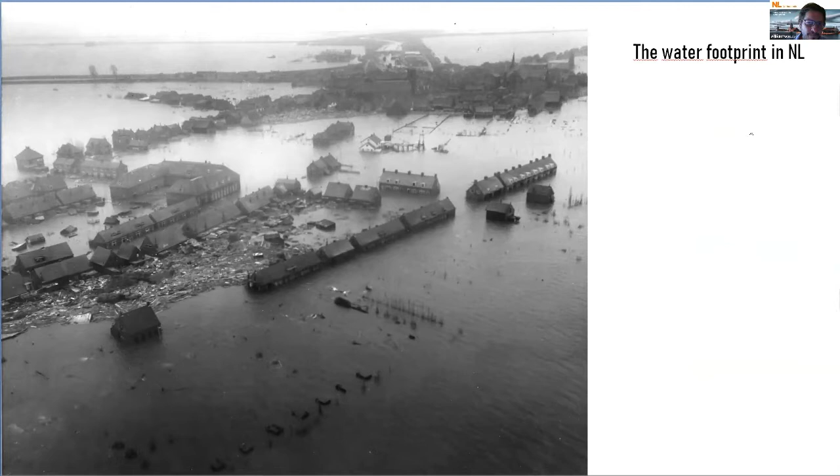This is to understand what we call the water footprint in the Netherlands. Of course, climate change affects us all, but its effects differ strongly from one country or region to another—coming back to this idea of context.

For the Netherlands, several reports from the past years have shown negative impacts, with extreme weather events such as increased temperatures, heat waves, drought, and of course the rising of sea level.

In the Netherlands, the Room for the River program is a government design plan intended to address flood protection, master landscaping, and the improvement of environmental conditions in areas surrounding Dutch rivers.

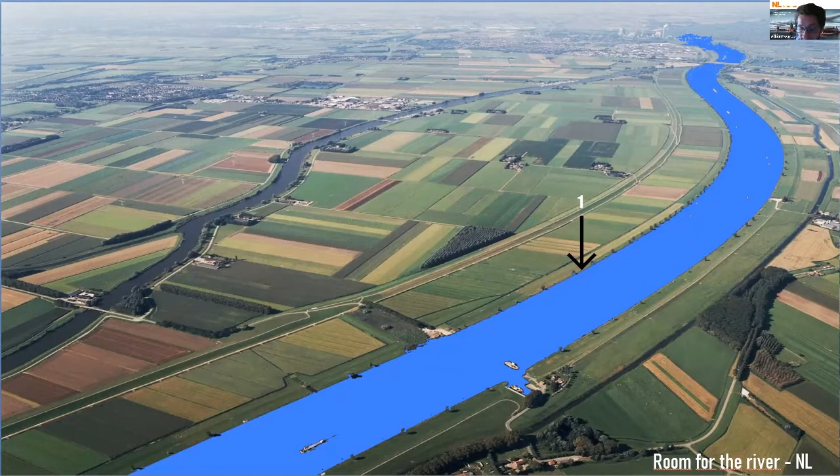This project was active from 2006 till 2017, and the main goal was to manage higher water levels in rivers by lowering the levels of flood plains next to them, as we can see in this picture, creating water buffers, relocating levees, increasing the depth of side channels, and constructing flood bypasses as well.

It also contemplates the possibility of creating solid platforms to develop new activities in these floodplains. Mitigation, we could say, is the best form of adaptation to climate change.

And this is, we could say, one of the most important statements that we have in the Netherlands to deal with this.

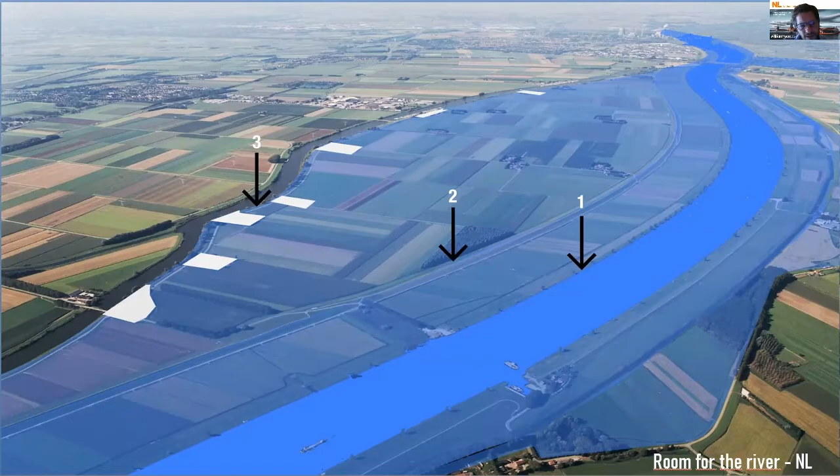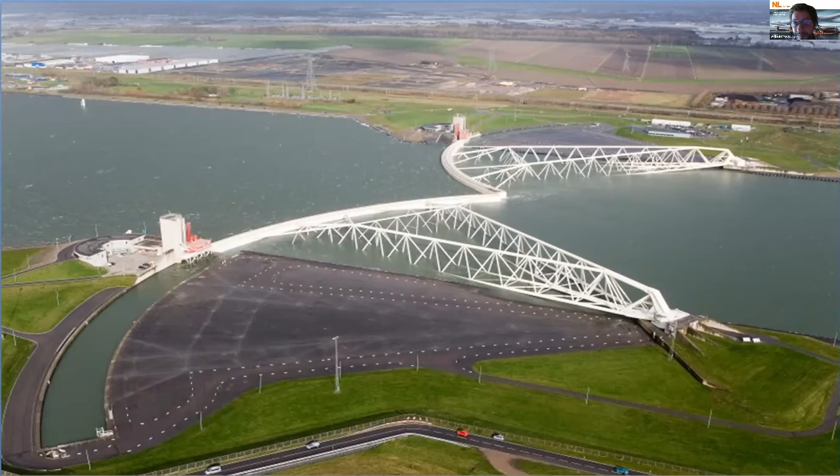Of course, this is all these years of development, of history, all these engineering interventions in the territory. We could say on a first level of urban structure, the water in the Netherlands defines the urban tissue, different urban and rural patterns.

So when we refer to this term, the water footprint is not the typical engineering approach where we define a specific consumption amount of water for agriculture. The concept of water footprint for us is related to this mark left by water in the territory, the cultural aspect of water, which is also very, very important.

As a member state of the European Union, the Netherlands is committed to the European goal of achieving climate neutrality, as the ambassador explained, by 2050, and to the European target of a net domestic reduction of at least 55% in greenhouse emissions. The question, of course, is how to achieve this.

Well, after this brief introduction, we'll try to grab some main lessons from the past that we would like to share with you, to understand why or how.

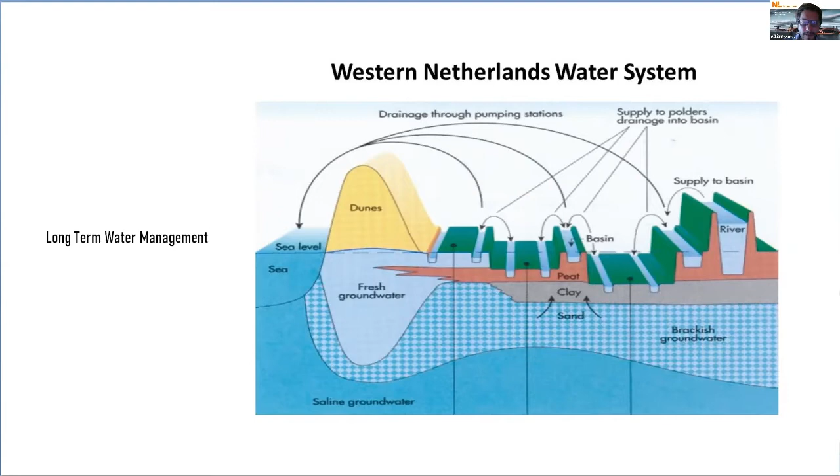Another important aspect related to this is long-term water management. Mostly the long-term part of it is key. This is an image representing the Delta model that we developed in the Netherlands. This model consists of 3 national programs and 6 regional programs, including safety standards, water supply, spatial management, etc.

And lastly, I would say that this could also be a trademark for the Netherlands: thinking out of the box. Sometimes it's very surprising to see that when you think everything is solved, the Dutch are always bringing a new concept, a bold concept that provides innovative solutions to deal with these aspects. This was the case, one beautiful example in the Dutch coast as well.

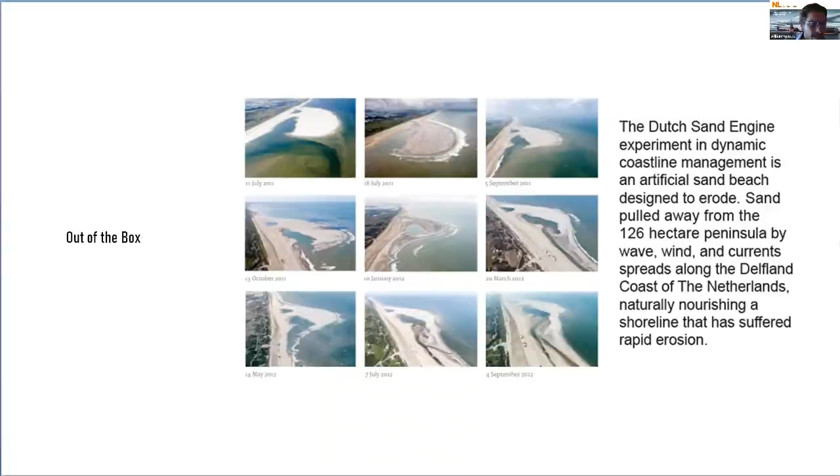It was an experiment, the Sand Engine, using the forces, the currents, the sea currents, adding sediments in specific areas, very well planned. Naturally, it was building — we introduced the term building with nature here. This artificial, if you want, natural-dash-artificial peninsula. This was the final result. Still there. Thinking out of the box.

Regarding the cultural context and the second aspect I wanted to emphasize, I brought this short story about the bicycle. Because it's not just about the artifact itself, but how something like this can trigger or define our urban planning. We must tell you about the bike, not only as transport, but as an urban catalyzer.

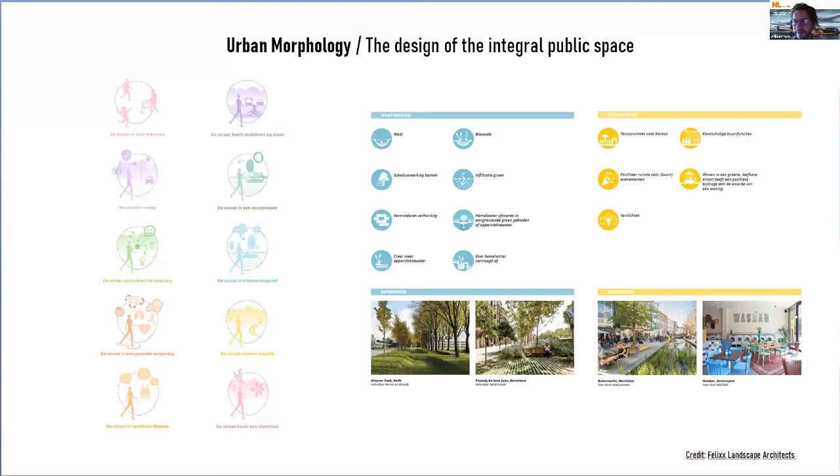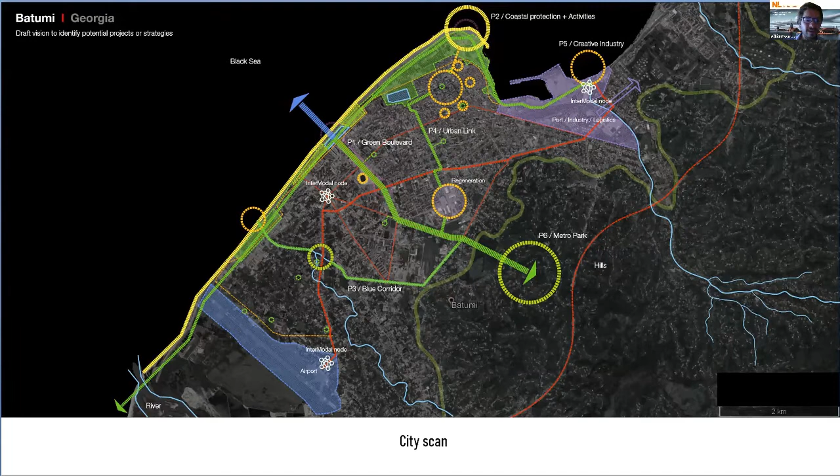We have the chance to work in the city of Batumi, together with my colleague Dirikian, and with the collaboration of Wetlands International. To give you a brief example of how we proceeded with the city, the first step was to make a quick scan of the city to identify areas of opportunity. With that, we created priorities and defined two areas to develop.

The first was the green boulevard, that today is actually not so green, but the idea was to transform this boulevard and better connect this area with the sea, because now we have this lake in between. You don't see the entire picture, but behind the lake we have the coast and the sea.

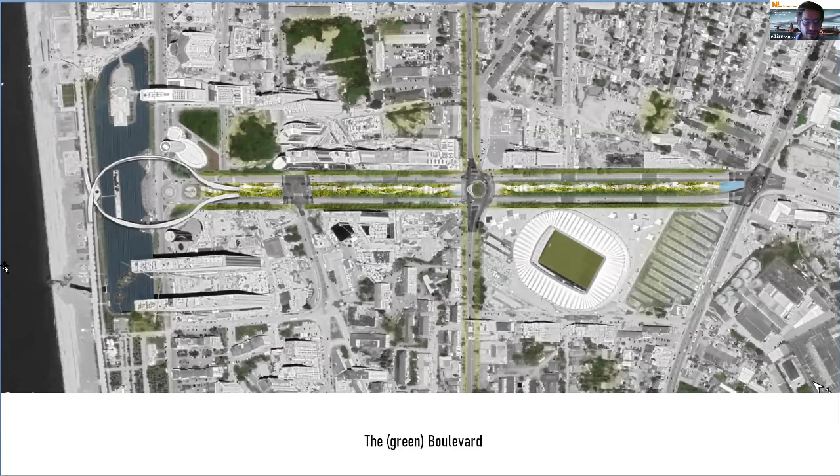So what we did was propose to transform this area into a linear park and connect through two pedestrian bridges over the lake to the coast. With that we improve the conditions and quality of urban space, we work with resilience, infiltrate water, create better urban ecosystems, and make it better for visitors. This is just an impression of how this can be transformed.

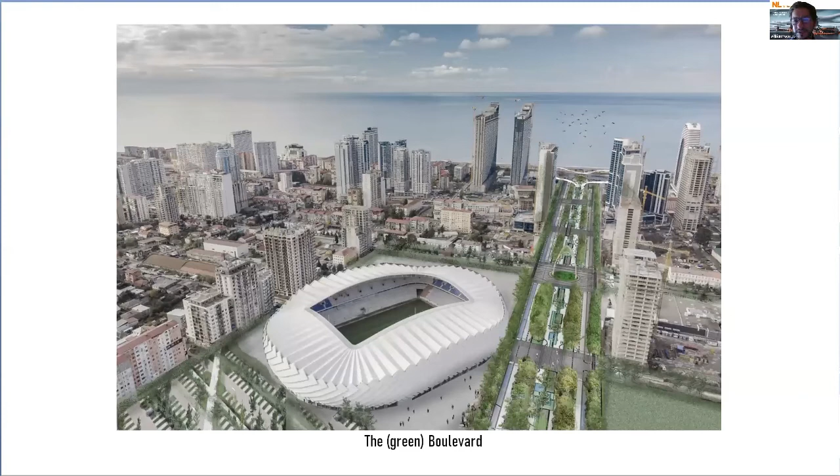And the second area of opportunity we defined was the port area, where the strategy was to bring or create a creative industry district and a coastal park.

This was more or less the result of that plan, where we transform what you see here in light purple - an in-between zone with highways going around, some old factories and abandoned shipyards. The idea is to transform this and use the synergy of this intervention to create a new urban coastal park next to the port, as you can see in this color zone, using nature-based solutions, building with nature, as we explained earlier in our Dutch examples.

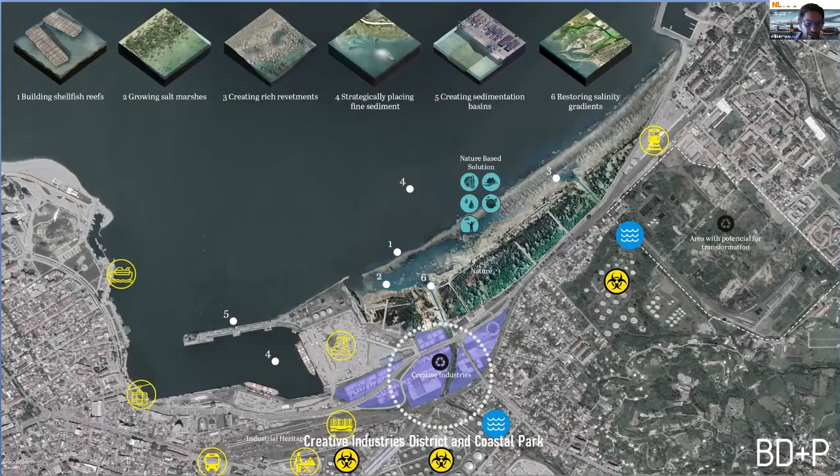For Kutaisi, we've been investigating a little bit. Of course, we would like to hear from you - what are your challenges, what are your ideas. This is a small scheme of the city.

We are aware that you have this river flowing from north to south. We identified some areas for possible zoning: an industrial area, tourist destinations, the city center where the railway stations are located, where we can create a connection, perhaps another green corridor for biodiversity, potential youth districts, etc.

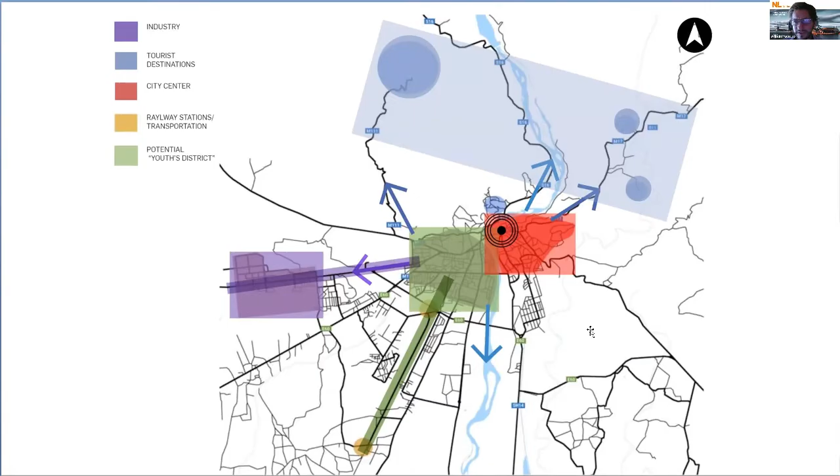I work in the Netherlands at the university and also for an engineering firm, and as you know, the Netherlands is famous for its way of working with water. What Adrian was telling you was to look at your own area and define what makes it specific, what makes it unique, and build your master plan on that. I'm really happy to hear from the mayor that you are working on a master plan that already includes green city measures and smart city measures - I think that fits well.

As you know, and I saw it last week when I was in Georgia, in Tbilisi and in Batumi, cities are growing. Where today we have only 3.5 billion people living in cities, by 2030 that will be 60%. So it will be rapidly increasing.

That brings challenges with it. Maybe due to Corona and the COVID situation, this trend will go slower, because I know from friends who want to move out of the city and live in the rural area again. But I think in general, the trend is that more and more people will live in cities.

We also know that 90% of disasters are related to water. That means not only flooding from your city being located along a river, but also flooding from rainfall. Nowadays, if you look at most cities, it's very much paved, a lot of concrete. As an example, the Batumi Boulevard is very sensitive to flooding due to rainfall.

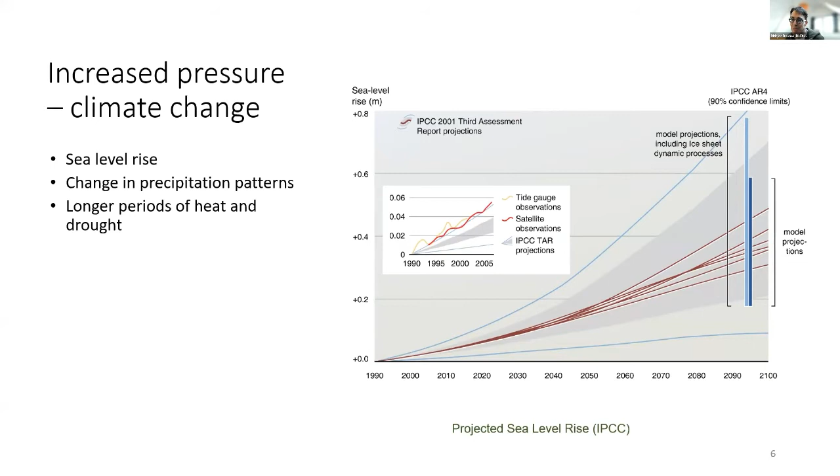We have rain too. In the past, we calculated our sewage system for rainfall of 20 millimeters in an hour, but now we've seen rainfall events of 100 millimeters in an hour. That means our sewage systems cannot cope with it. So we have to do things already now.

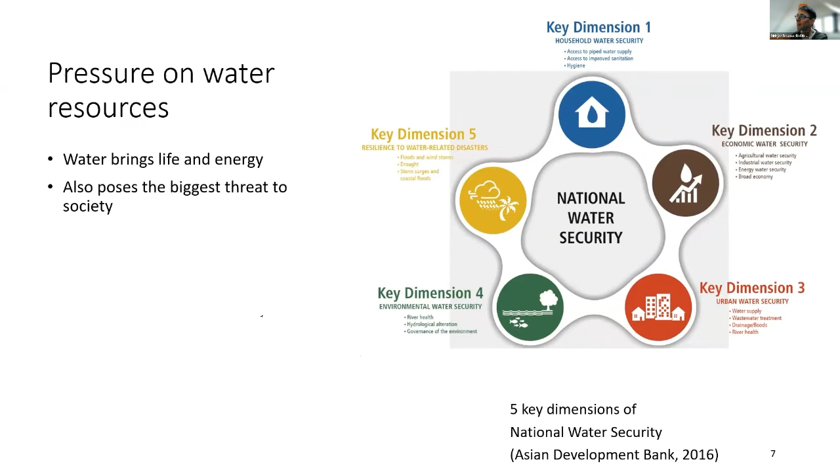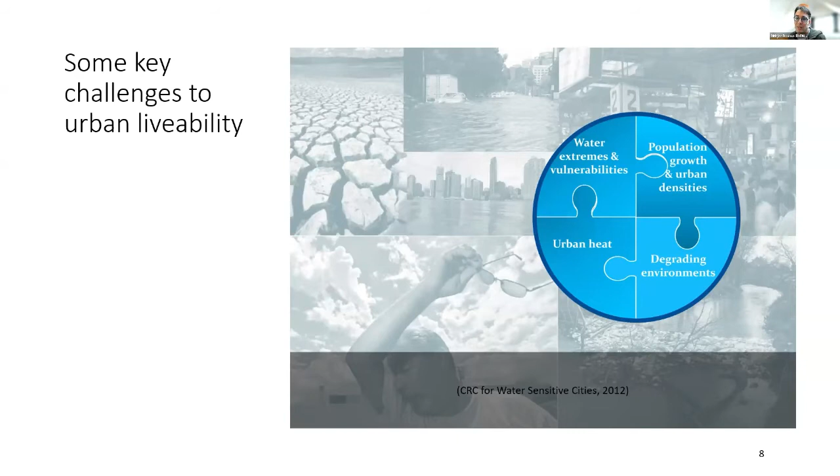All these pressures from water affect each household - this is 5 dimensions from the Asian Development Bank showing the impact of water on our daily life. So my message to you is, if you look at your urban livability and urban planning for your city, take water into account - not only the existence of water, but also if there is no water, like dry periods. Maybe we can keep the water longer, so you can use it for irrigation to keep the biodiversity in your city.

For this, we have solutions - what we call, and the World Bank calls, the blue and green infrastructure. That means trying to keep forest, wildlife, and the river in your city. Don't make everything concrete - just the blue and the green, and also blue measures. How is your stormwater, sewage system, and drainage organized? How are you protected against rainfall, flooding, or flooding from the river?

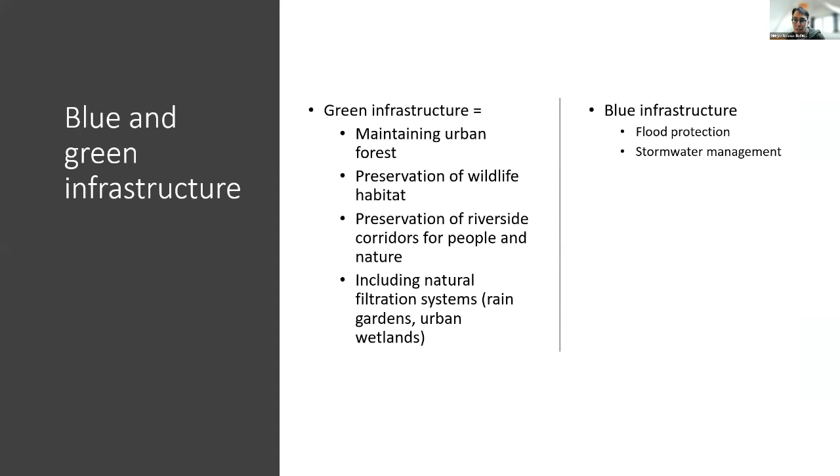This is a bit high level, and I'd like to show further on in the presentation examples of how you could apply that at street level. But before you're at street level, you start with a vision. It's nice to hear that you and your master plan already have a vision on greening your city, and you already have a vision on smarting your city.

What I teach the students is often the water sensitive city concept. That means making your city physically attractive to keep the water, to solve water issues in the future. But that's too narrow-minded - what it actually means is you can also co-create things for mobility and the social sphere. You can do more than just address the water issue.

This is a bit blurry picture, but this is Hoboken in New York, where we designed a dike to protect it from river flooding, or coastal flooding. But this dike is also a cycling road - it's also a nice park for people to go out.

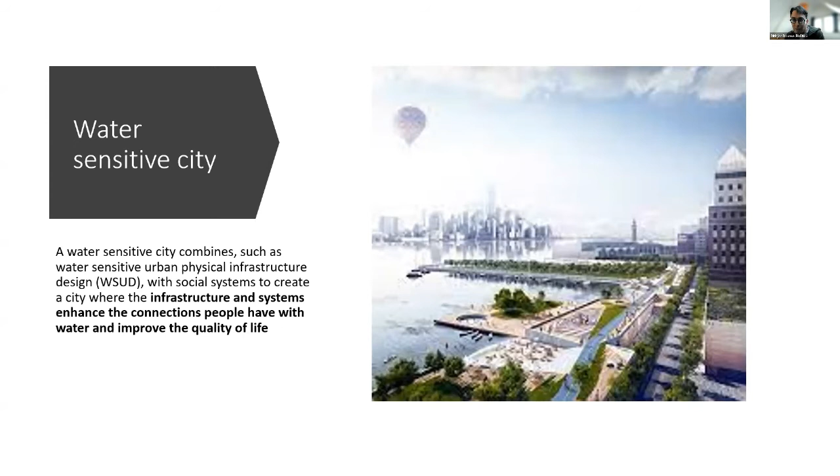It's also a building where you have concerts. So the dike is not just a dike, not just to keep the water out. It also serves the people who live there. You need to know what kind of people are living there, because you don't want to make a children's playground if only old people live there. Or you don't want to make a park with a stepped approach where old people live, because they cannot walk all those steps. So you want to adjust your concept for flood protection to the people who live there, and for that you also want to involve stakeholders.

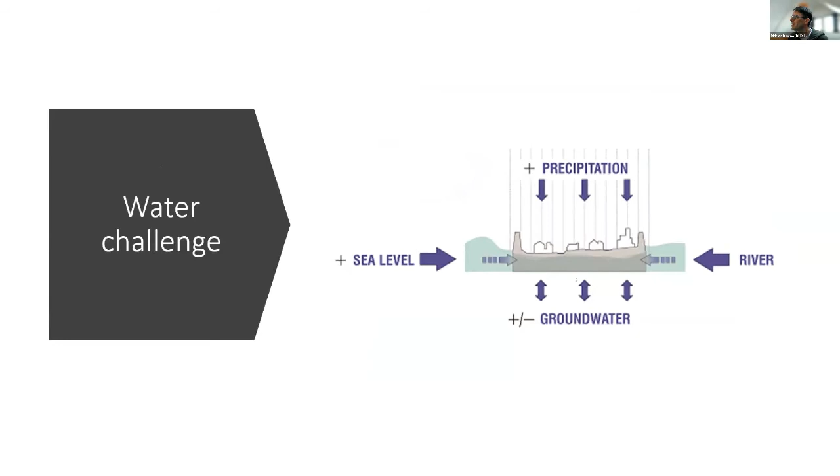One is to store, it's like a sponge, and the rain will be kept inside the sponge. The other is retention, so you can squeeze a bit out, slowly it will drip out of the sponge when it gets full, and then it will be kept for a while, it's just delaying. Or you can discharge it, so you get the water as quick as possible out of your system. This is always necessary to prevent wet feet, because you don't want 30 centimeters of water on your street level, or like in Asia where they drive a lot on scooters and motorcycles. It should not come above the pipe, because if it's above the pipe, the motorcycle will not work.

So what you could do in the past, what we did mostly, was bring the rain that comes in, run it off quickly, drain it directly into your sewage system, and then discharge it to a river. Nowadays we think that is still possible for some locations, but you want to do more and better, also in combination with that biodiversity wish and greening wish.

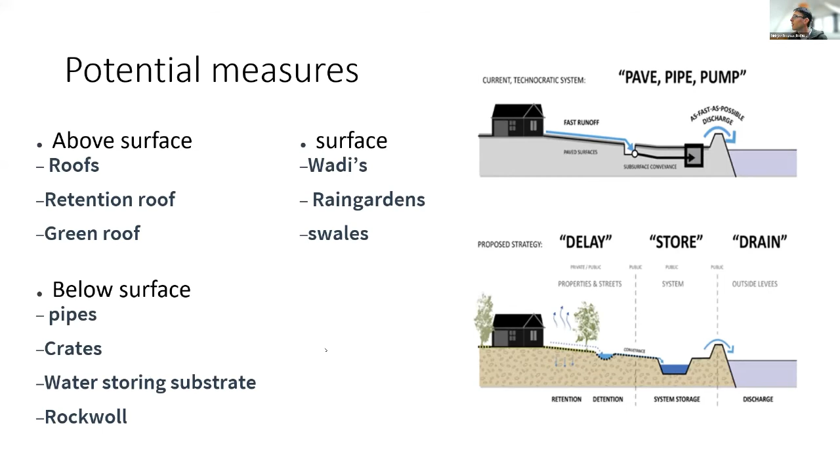So this is a lower place in your street where water can go in when you have a rainfall event. On the other days of the year it's dry, there's nothing inside, it's a wadi. You also have rain gardens, which are just flowers and trees along your street where you can also keep water. You can store it there and delay it. And of course you have your solutions below the surface, like pipes, crates, water storage under your surface. I will show some examples in the next slide.

So here you see all kinds of possibilities nowadays. We see green roofs with solar panels. We see here even water retention on your roof, so you can keep the water here for a while before you drain it to your sewage systems, to your pipes. You have swales where water can just be stored. You also have the rain-catching parts along the buildings. And you can also use underground structures to store water.

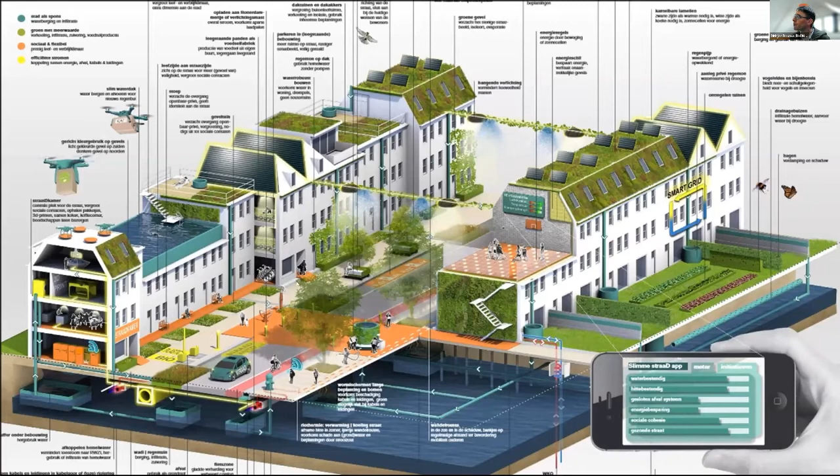So what my message is to you is that it's not just about water, because if you have more green, it's also good for the people. More green means less heat stress, so the well-being of people will improve. It also improves biodiversity, the eco values, the water quality, the environment, as was mentioned. It's also food for insects and birds. And that is also very important, especially in the Netherlands, that the risk of extreme rain events will be lower. So you also help the safety.

Now, at building level, you can think about this kind of roof. This is, of course, an extreme example, but it is going to be constructed in Utrecht.

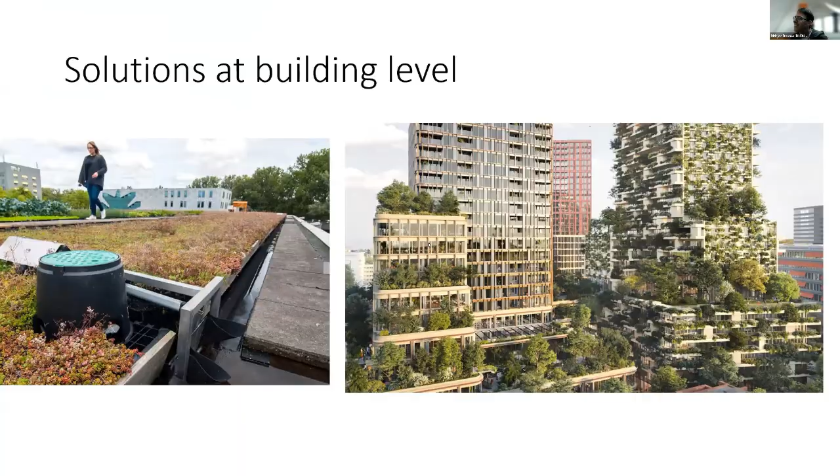But it greens your city. This is at street level an example where this is a new built, redeveloped area, where you see surface water. So they made room for surface water.

And you see also that water from the roofs goes on the street and just floats along it to here, for instance. This is a very particular square from Rotterdam city. This is a dry day, you see blue sky, not often in the Netherlands, but here, nice blue sky. People enjoying this park, this square.

But when it's raining, the rain from the roofs and the street is all stored in this square. So normally you can play basketball, but during a rain event, there is quite a layer of water here. Then it's slowly released to the sewage system afterward. So it's a concept where you do not get directly all the rainfall into your sewage system, which would cause flooding.

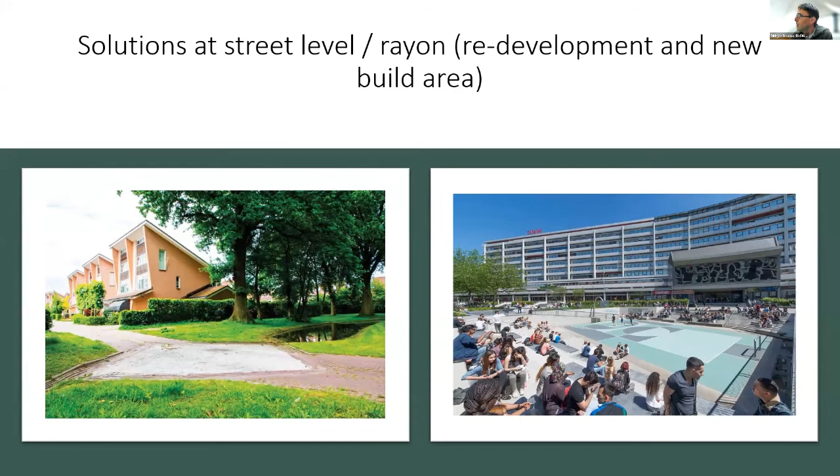So there are also challenges if you look at such things. If you want to make a particular roof full of water, your building needs to be strong enough. Myself, I have a dacha, and it's quite an old one. I really would like one, because I'm lecturing about green roofs, etc., so I would like to have a green roof on the dacha, but unfortunately my building is not strong enough, so I cannot do that.

So I've now decided to take out some of the concrete around the building and make it more green there.

But also, if you want to construct such a square, like the water square in Rotterdam I showed you, you need to have room for it. There should be no other constructions or functions there. And you can imagine in a densely populated country like the Netherlands, every spot has a function. So you need to discuss with stakeholders, etc., to come to a good solution for that.

I can imagine that also in Kutaisi, this is the case, or Tbilisi also, where quite a lot of people live, where every spot has a function.

What's also important to take into account is what is underground. You cannot always see that, but our boulevard in Batumi that we worked on—I'm sure there are cables, maybe sewage pipes, but we do not know from our satellite images where they are. So we might have planted a tree on top of a cable in our design. That's of course not what you want. So it's very important to know, and I know that's a challenge for every city, to know where your cables are, where your pipes are, how your underground infrastructure is organized.

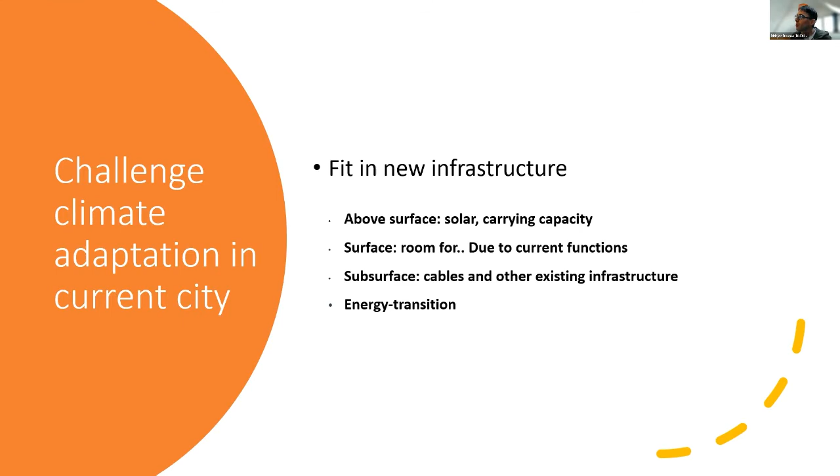So my message to you is: start with a vision. Like Batumi has 'green and vital.' I hear you also have green. It's good to start with a vision for your city that fits your city. Look at your footprint, as Adrian calls it—look at your footprint as a city and define what makes your city your city.

And then know your city well. I teach my students always about city as text. I'm not sure if you're familiar with it—city as text means go into your city and read your city like a text. Normally you take a book and you read, but go out to your street where you want to change things and read your city. What are people doing there? How are people moving? What kind of economy is there? Are they old? Are they young?

So I often give my students an assignment, and in Rotterdam city, they have to go to that street and sit there half a day, just observing what is happening there—reading their city. That's a call I would like to make to you. It's not a waste of time, actually. It's very interesting to see how people use the street, because it means when you design things, when you want to change things, you can take that into account.

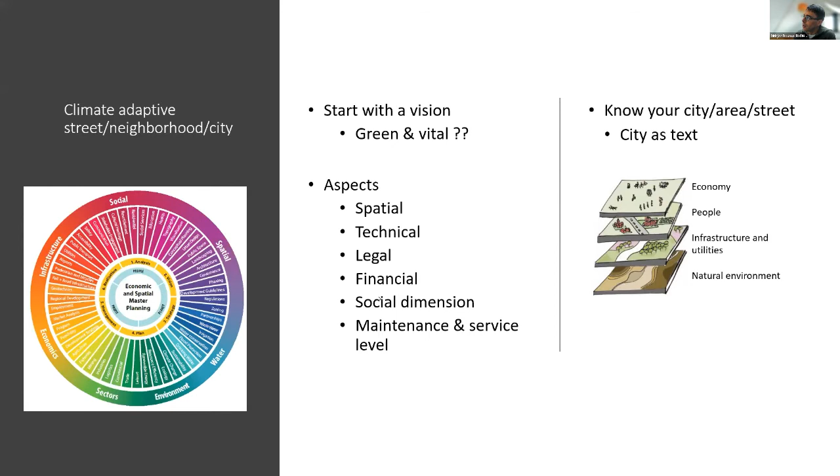So the underground data, the infrastructure, what kind of people, how old are they, what type, are they very active? Do they want mountaineering, or do they want just lazy things? This kind of things you need to know. And there are different aspects you always take into your design.

If you design at a very practical level, your street, make a water balance model. So if a raindrop falls into your system, how does it go through your system to the sewage, to the wastewater treatment plant? I will show in the next slide how that works.

Then define your measure and think about your raindrop again. And then take into account climate scenarios. So if it will be drier, how does your system work then? If it will be more wet, how does your system work then?

Define a water management plan. And same you do for spatial. So think about what Adrian said about what is your footprint? How does it look like? What are your spatial qualities? Where are the unique things in your street, what you would like to keep, or even maybe highlight? And which things you think are not anymore in use and you could maybe reduce.

But also think about the future. The water square in Rotterdam, people like it very much. They come from abroad and want to do it, but people do not realize that it takes maintenance. It needs a whole organization to keep it clean from all the leaves from the trees around, etc. So if you design things for your street, make plans, also take into account the maintenance. It can be, over time, better to choose a more expensive solution, but in the lifetime, if you take the life cycle analysis, it might be cheaper at the end because you do not need to replace it every 4 or 5 years, for instance.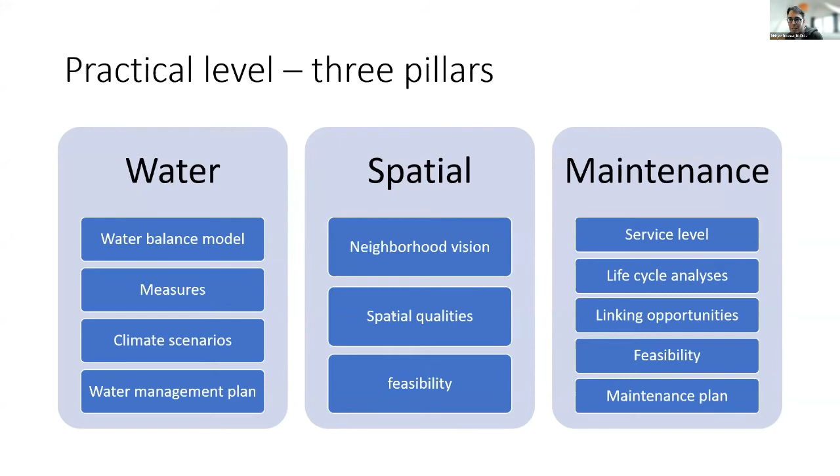So this is then what I say about the raindrop. It comes from the atmosphere, it falls on the paved or the unpaved area. So you can calculate that and you can play with the numbers.

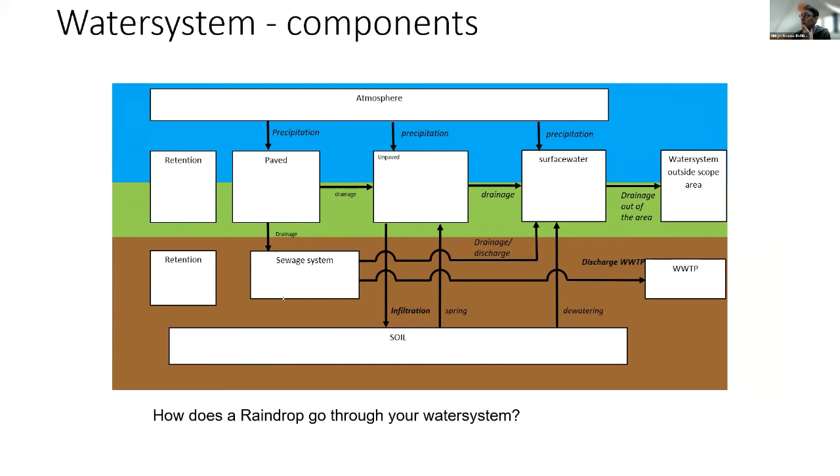So I would like to show a few examples. This is an example from Amsterdam, the city. They asked us to make this water management plan and to make a functional design of rainwater gardens. And we did that together with a landscape architect, so it's a combination between Adrian and me at the moment.

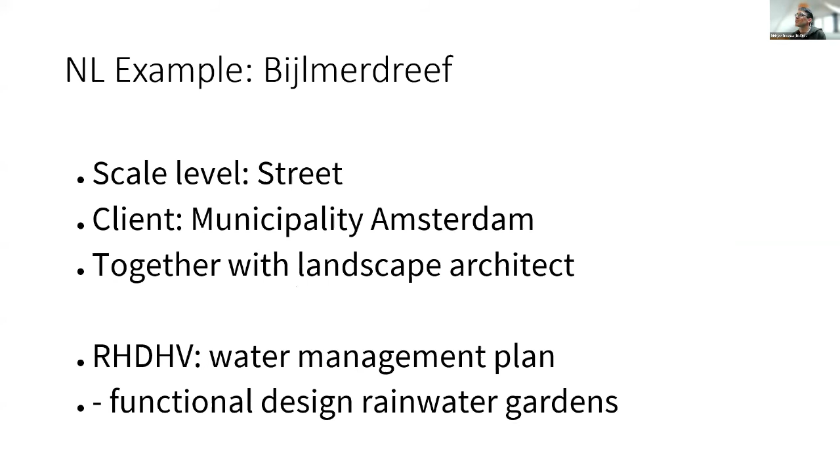So this is the street from Google Maps. As you can see, it's only paved. Very big buildings. No green, no biodiversity. If a raindrop falls here, you can imagine that everything goes directly to the sewage system.

So if the sewage system is calculated for this 20 millimeter an hour rain event, you can imagine what happens if we have 100, or maybe the one they had in Copenhagen, that was 140 millimeters in 1 hour. Then it will be flooded here, you cannot drive. That will be in an area like this in Amsterdam, Bijlmerdreef, where there's a lot of companies located, logistical firms, etc. That will be a disaster, that will cost money.

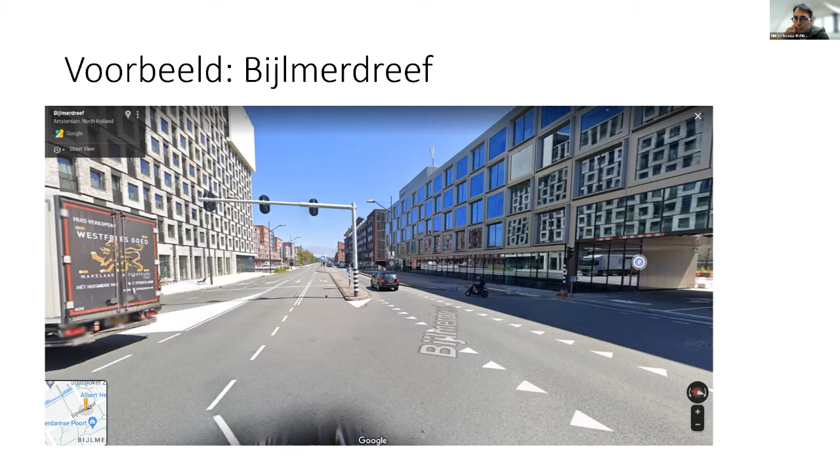If we look here, this is a map of a 60 millimeter in 1 hour rain event. So you have then at some spots 30 centimeters of water. And this is the Bijlmerdreef, so particularly this area, it will have 20 centimeters of water. That's not desirable, of course.

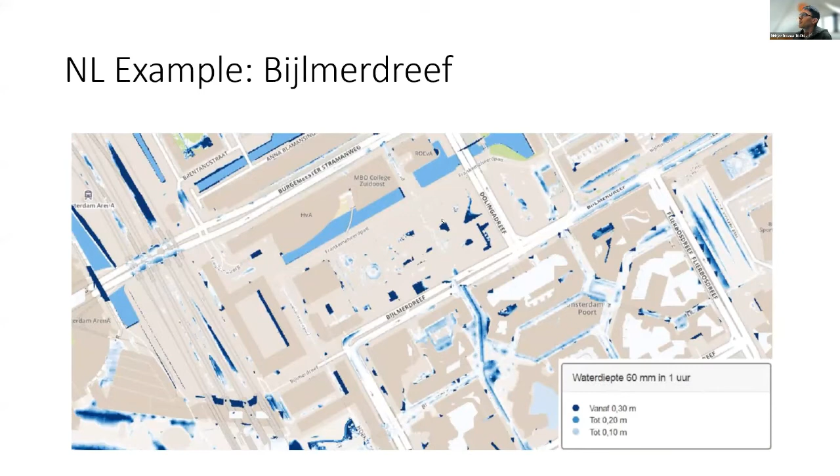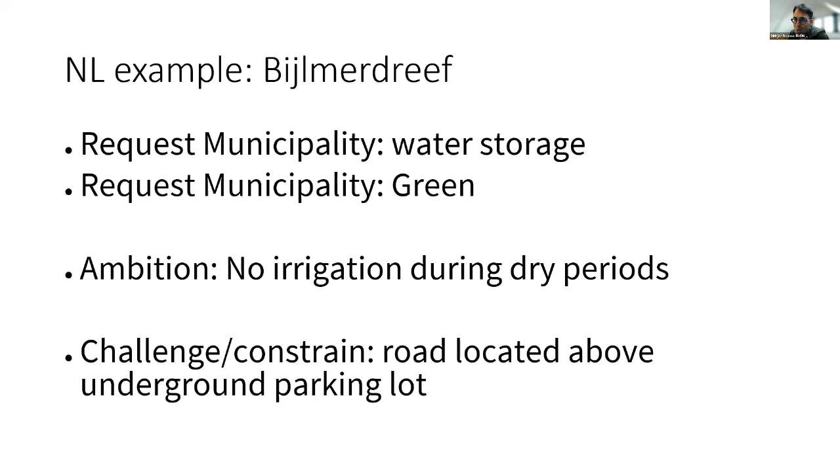So the municipality asked us to design something more green, where you can store water. And also, if you have green in such an area, they do not have the money to go out there and irrigate it. So they want a design where the trees can survive also longer periods of dry. And what is a challenge in our design is that the road is located on top of a parking lot, an underground parking lot. So that makes, of course, a challenge for what you construct.

So what our design was is as follows. Here you see a rain garden. So if water falls on the street level, it flows into here. This is a bit lowered compared to the street level. You have plants in it and water then. And then it slowly infiltrates into the ground. So it's also good for your groundwater.

The sewage system is here, so you also have an additional overflow to the sewage. And also in the middle of the street, we designed trees, etc. But we did not take the big trees, we took more shallow ones, or how do you say, low, not too high. So you still don't have the huge weight on the underground.

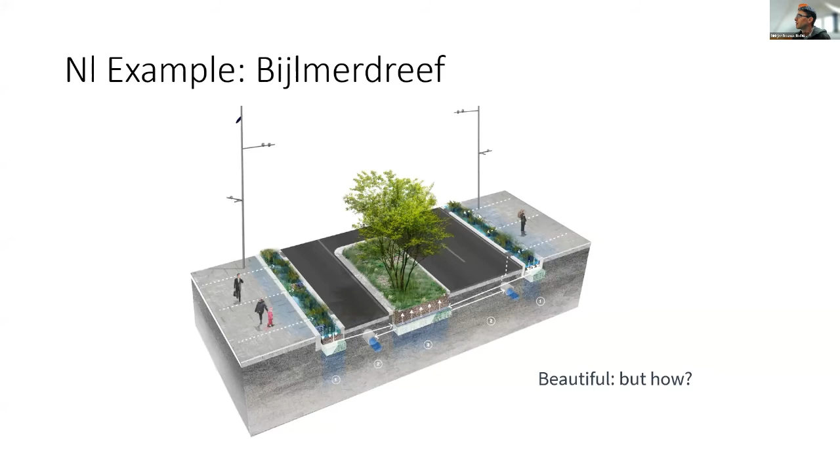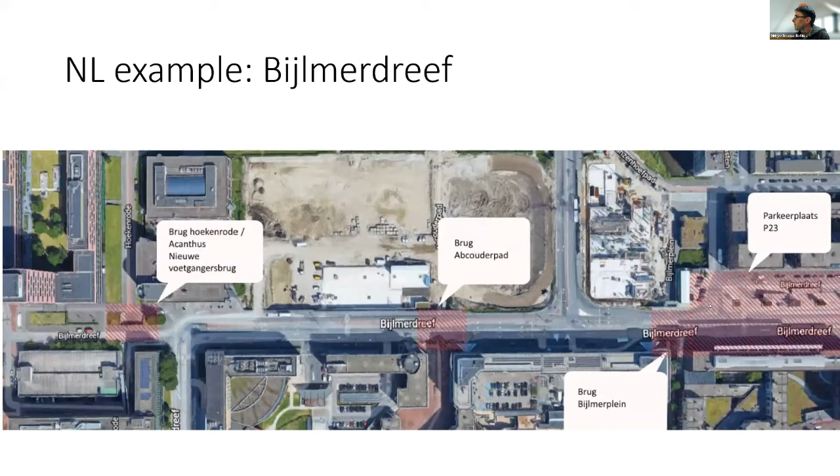It's similar here, so this is our design. And then we had to look, of course, at the map, where to locate it, how to connect it. So here you might need also a bridge. Here's the parking, etc. So we had to see where it fits in the spatial area.

What we did, and what I would recommend you also, is to first collect information and set an ambition as a municipality. What do you want? Then make sure you have data about your soil, the surface water, the elevations, the people who live there, and also about the underground structures. That really is a challenge, because every company just digs and puts in its own cables. But as a municipality, it's important to know this for your designs, and to prevent digging into somebody else's cables.

I would also recommend taking all the consultation into account. It's important to talk with people around a street, how they use it, what they do there, and whether this fits with the design you prepared.

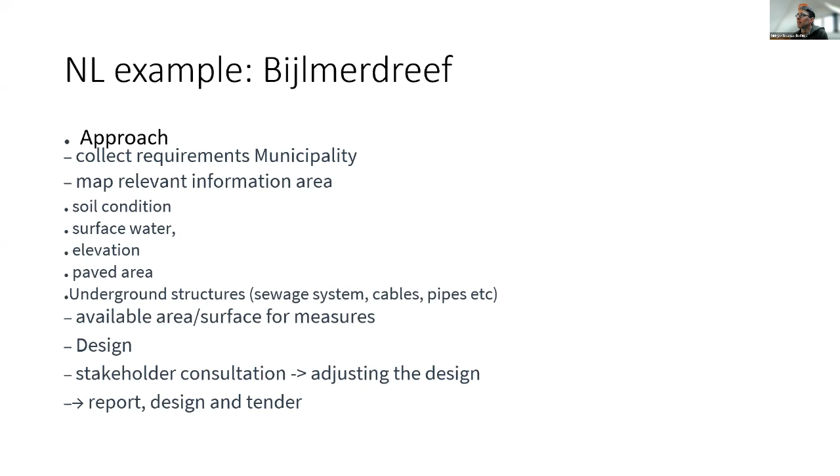That's a bit too much technical detail, but these are examples of rain gardens along the road, which is good for biodiversity and also prevents flooding on your street.

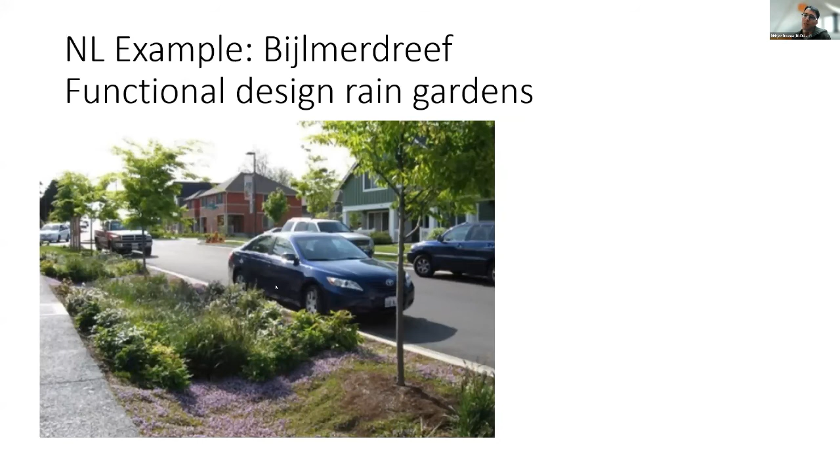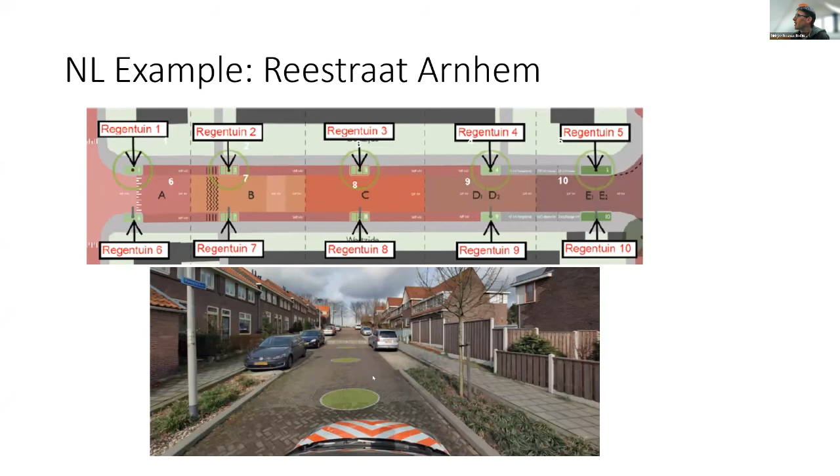This is an example from Arnhem, where we worked together with the university, by incident the university I work for, to look at whether this kind of measure does work. So this is the street, these are the gardens, and we wanted to know how much water can be stored in this rain garden. Together with students we pumped a lot of water in and measured it, and through this we could get an idea of how much infiltration and how well these rain gardens could work.

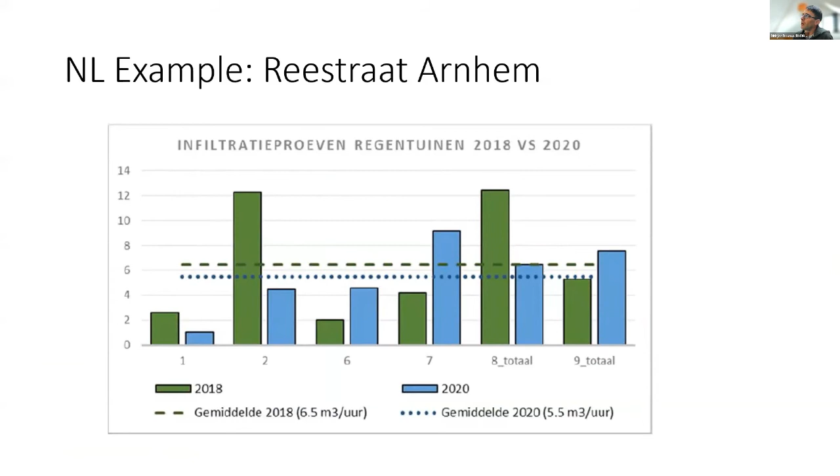Now I'd like to say a little bit about Rotterdam and that water square. Rotterdam in 1340 - here on top is the river Rotte, and 'dam' means of course dike. So this was a dike in the river Rotte - that's how the name Rotterdam started.

In a few years' time, in what we call our golden age, it expanded very quickly - this was 1700. A lot of labor was, of course, with the port. And nowadays only a little bit is green - there's a huge big city and a huge port area.

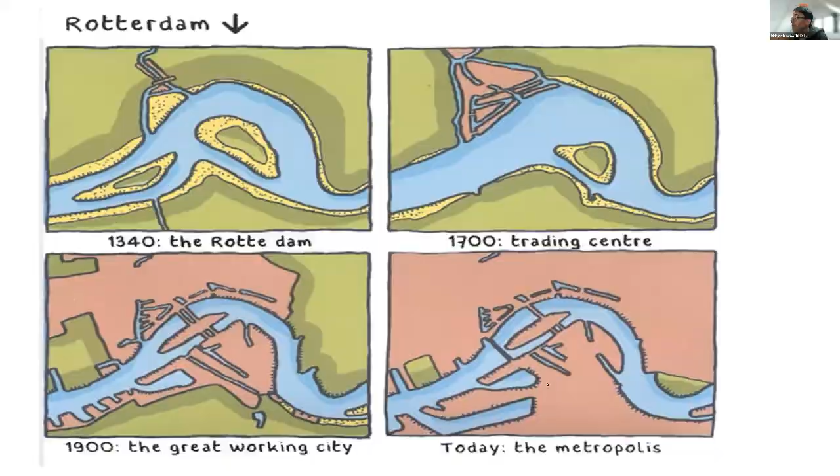If you look at the map, as Adrian also showed, this is the Netherlands with dikes, with water management issues. But if you remove the dikes, this is the Netherlands. Just guess where my house is located, where I'm working now - I'm living here on what we call the hills in the Netherlands. It's only 50 meters high, but this is the hilltop where my house is located. You can imagine what my education is, of course.

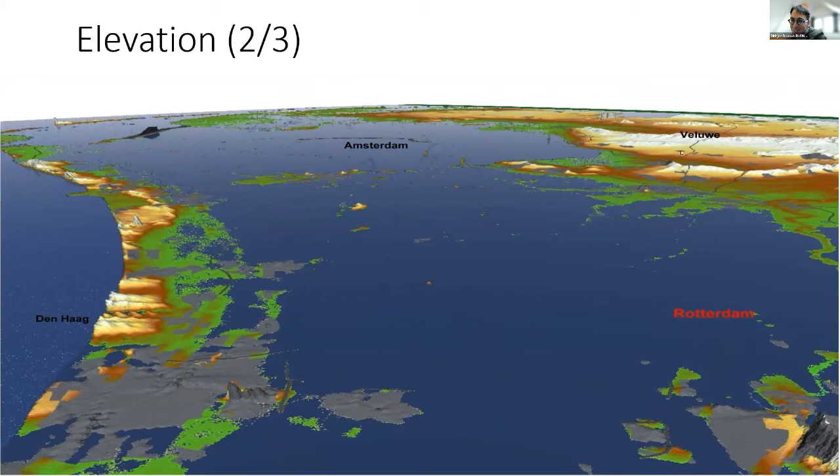As Adrian told you about the footprint of your city - Rotterdam also has this big port, and all kinds of canals and lakes. They define very much in Rotterdam how you can design your city.

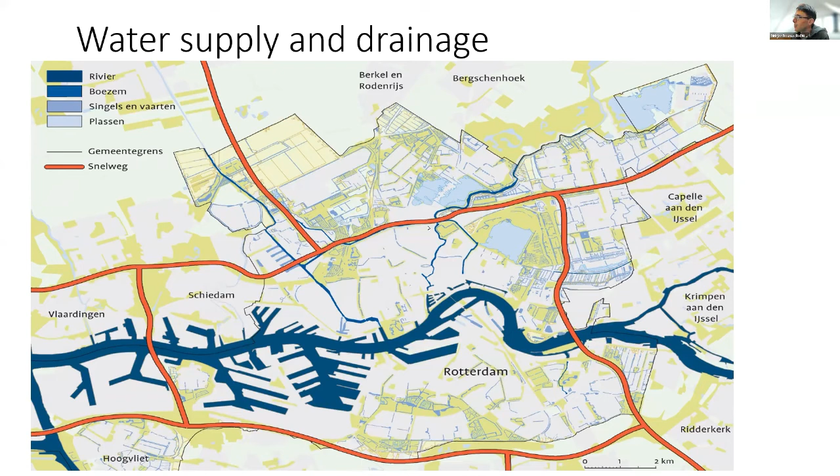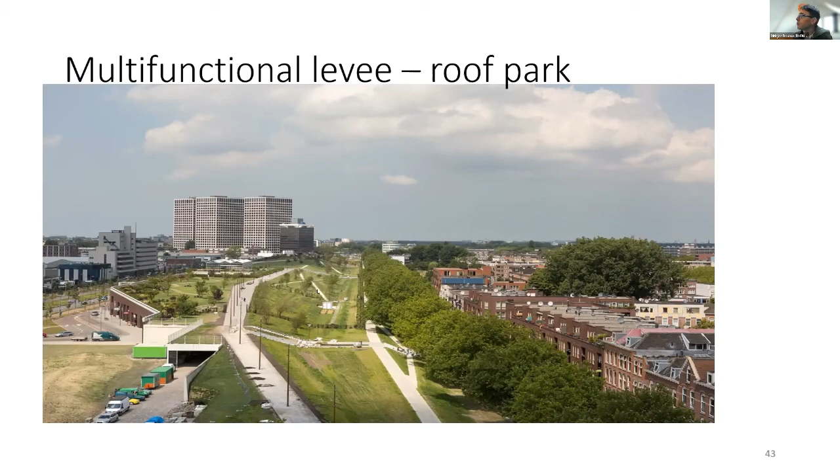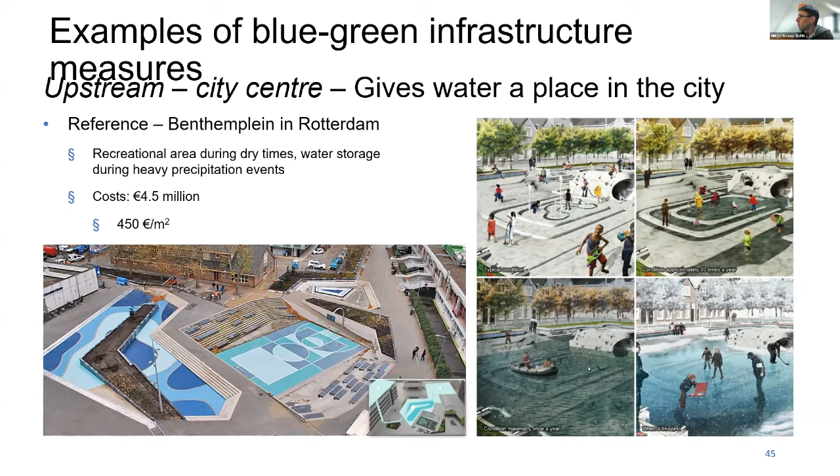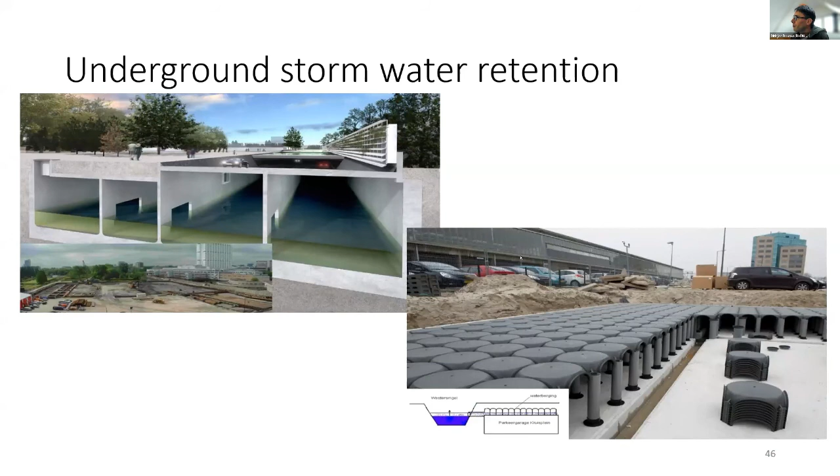Now, because we have more public transport, we don't want all the cars in the inner cities anymore, so we are turning those streets back into canals. This is an example of a new canal—actually it was a canal, it became a road, and now it's a canal again. This creates more space for water.

So it also prevents us from these rain events causing flooding.

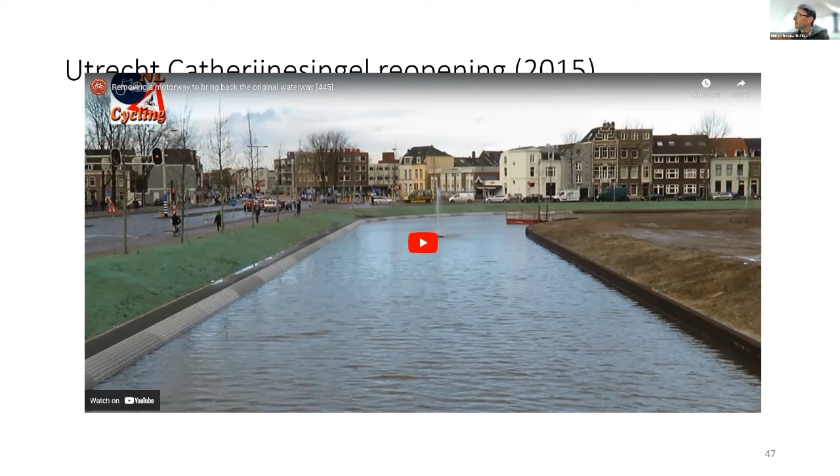Nowadays we want them back, because what do you like most—water underground where you can't see it, or a picture like this? It's really nice for kids to take an evening or daytime walk. We call it daylighting the rivers—bringing them back to daylight. This is the Roombeek in Enschede, a very nice concept, I think.

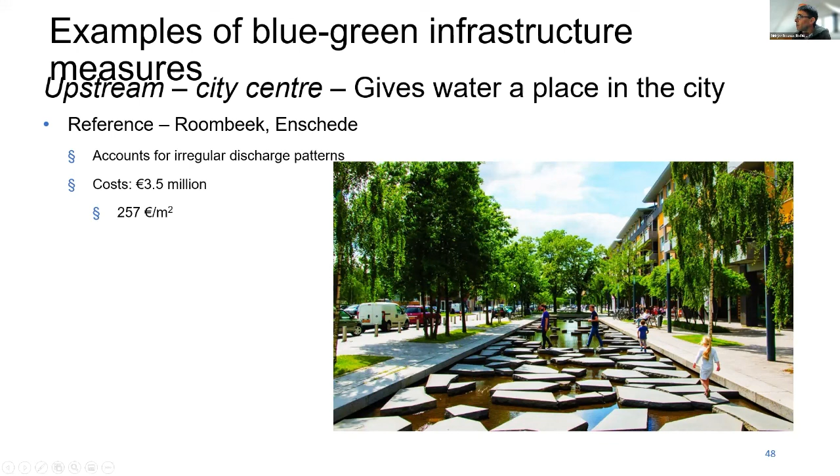And of course this is much more attractive for tourists too. This is the same creek. We also did a study for Kosovo, for a small town called Peja.

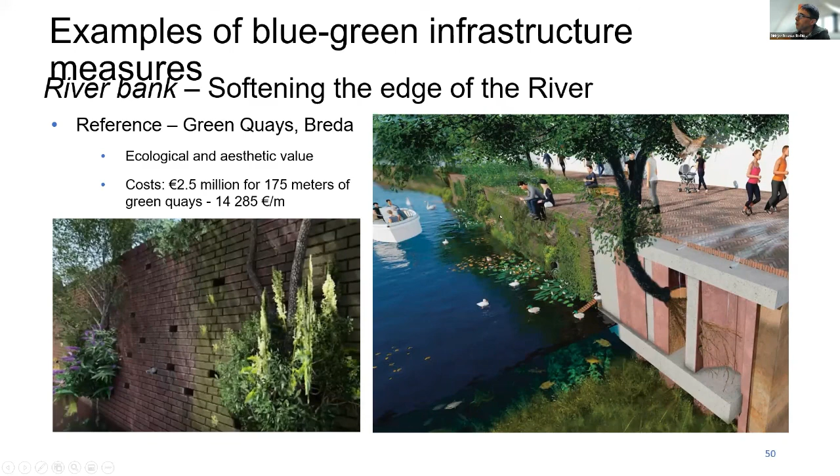Even this, I think, is still quite a high wall. You could think about lowering it like this—it's more attractive to walk along the water instead of on top of it, one meter above. As it's mentioned there: don't turn your back to the water, because water is also very lively and attractive. These are solutions you could use for that.

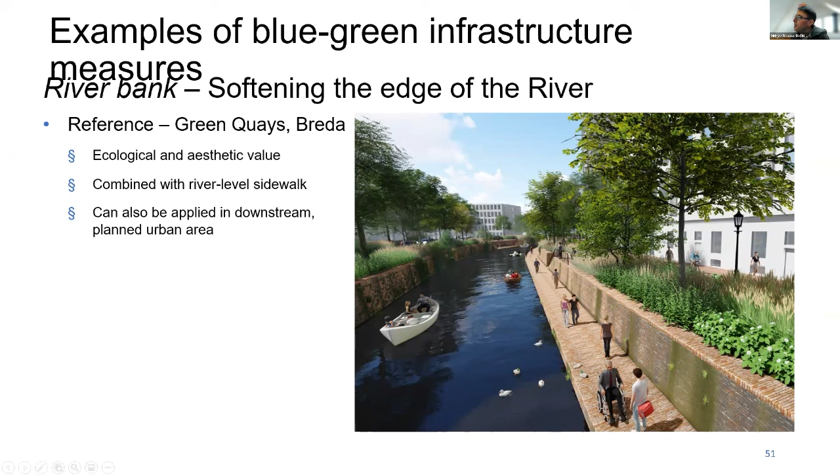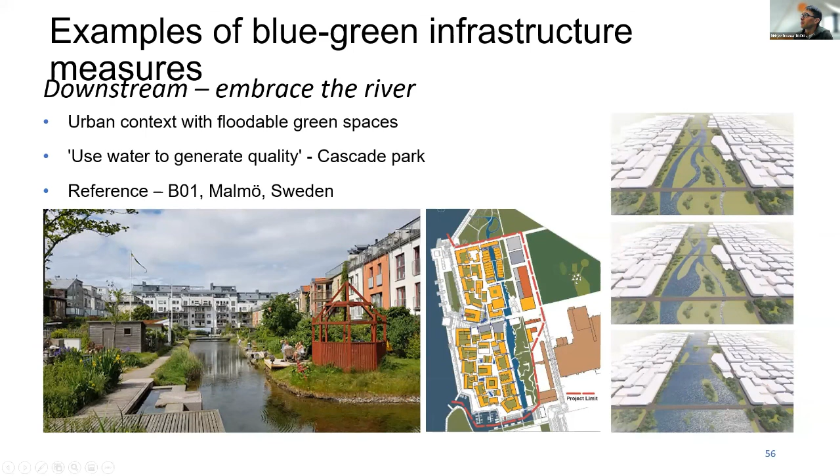I have more examples of that—what I call 'embrace the river.' You can build new urban areas, for instance, and instead of pushing the water out or burying it underground, start building and living around it. It's much more attractive. This is an example from Sweden, and a sponge city from China, where they also use that concept.

This is from Singapore—this was before, and in my opinion very ugly. Probably very effective, because you can drain the water very quickly, but it's less attractive. Here you created room for the water to stay, but also a nice park where people can play.

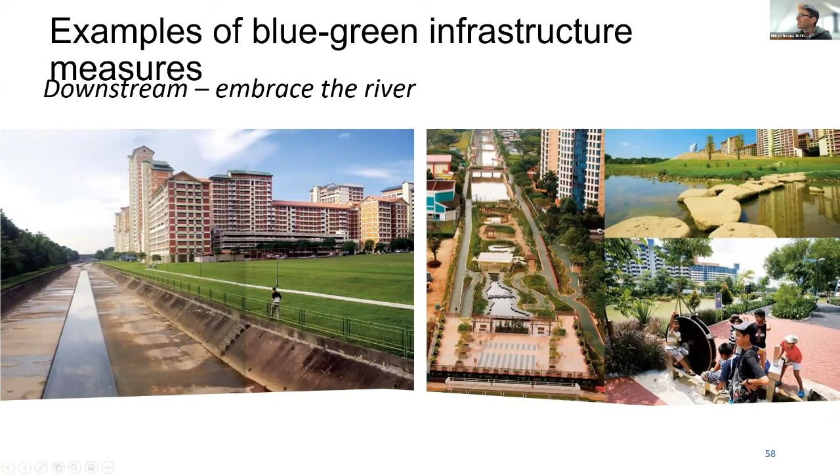This was a different culture too, so you want to have play equipment there. Asians often go out in the morning to exercise in the park, so you want to facilitate that, for instance.

So my message to you: collect your data and store it well. There are also very modern systems—the ADB has, for instance, SPADE, the Spatial Adaptation system, where you have a GIS environment to store all your data, making decision-making easier. If you want to know more, I can share a presentation by email.

Develop a strategy based on your city, your area, your street—what is typical for you—and make a climate adaptive strategy from that. Seek multifunctionality: not only a flood wall, but make it biodiversity-attractive and people-attractive too. Seek dialogue with your stakeholders, because they know their area best, and you don't want to build something that won't be used or that hampers other developments. So this is basically what I wanted to tell you.